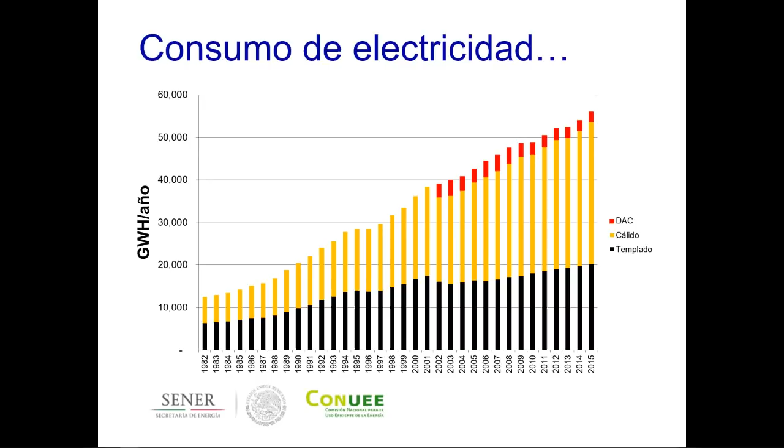One important reason for this is increased use of air conditioning. Y una razón principal para que esto sea así es el aumento en el uso del aire acondicionado.

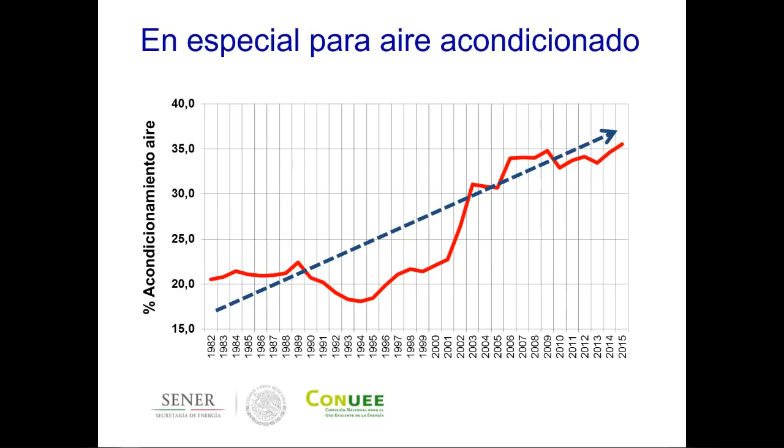The thing about electricity consumption for air conditioning is that it is peak demand. When you want air conditioning in your house or your office, that's when everybody else wants air conditioning too, the same months, the same hour.

So every extra demand for air conditioning is an extra strain on the whole electricity system. De tal manera que este aumento en la demanda, especialmente en la demanda pico, genera una fuerza sobre el sistema de generación eléctrico.

And this has a cost. This is the most expensive kilowatt hours, the peak hour kilowatt hours. Y esto tiene un costo porque estos kilowatt hora son los más caros, los de la demanda pico.

That's not necessarily what you feel in your electricity bill, but that is what the electricity system feels. Esto tal vez no lo vean reflejado en su recibo de luz, sin embargo, el sistema de generación de energía sí lo está experimentando. So, if there's a means of reducing this demand, it's worthwhile.

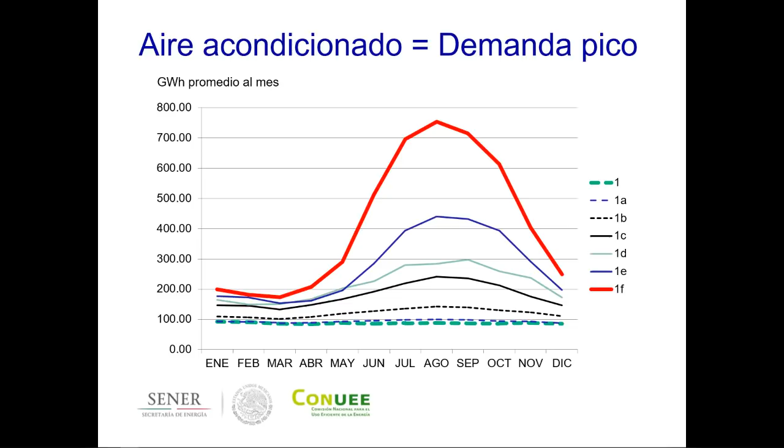De manera que si es posible reducir esta demanda, realmente vale la pena. So the question is, can you break this tendency, this trend?

Y si la respuesta fuera no, pues no tendría ningún sentido tener este webinar. So the answer is yes, but it's more than yes. It's yes, it's simple. Y la respuesta no solo es sí, sino es sí y además es sencillo.

If you think of your refrigerator, you also want to keep things cool inside there. Si ustedes piensan en su refrigerador, pues también quieren conservar dentro de él las cosas frescas. And there's a reason why the walls of the refrigerator and the door are thicker than the walls and door of an ordinary cupboard.

They are thicker because there's insulation inside. Y claro, están más gruesas porque hay aislamiento dentro de ellas.

And there's also a reason why you rarely see refrigerators made out of glass. I don't think you know of many people who put food in a glass container under the hot sun. We could say nobody does that. Creo que nadie haría eso.

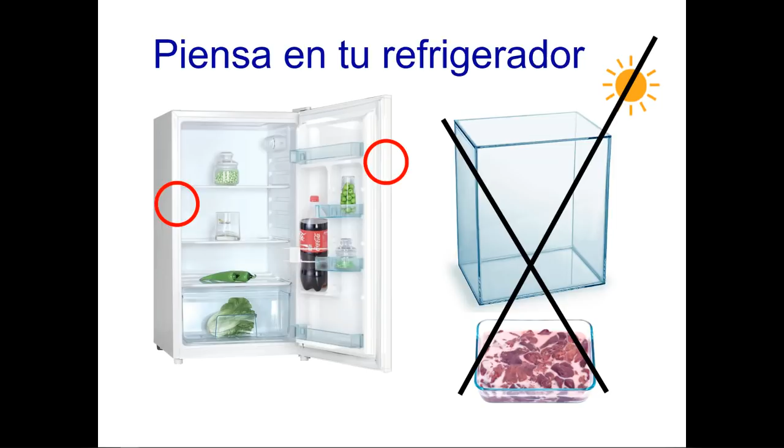That is what architects do to people.

So, what can you do to avoid this overheating of buildings? As I said, it really is very simple. Here's the first example.

That's the orientation of windows. If you put them to the east and west, they will see the sun, which is relatively low in the sky, and then the direct sunshine can get into the building.

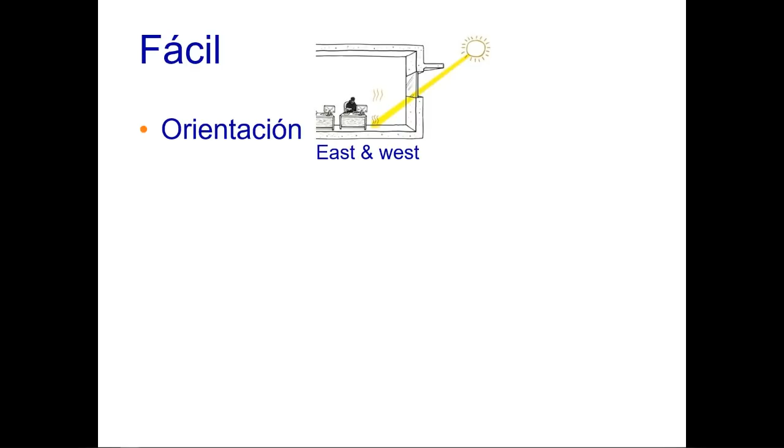But if the windows are to the south or north, then you will see the sun, which in these directions is almost at zenith, and it doesn't get into the building if there's a minimum of shading over the window.

And this is a no-cost measure. It doesn't cost more to put the windows south and north than to put them east and west.

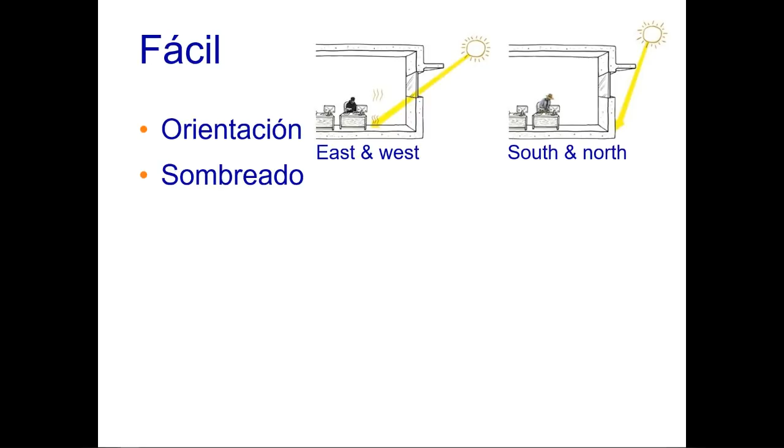Another example is that in general, of course, it's a good idea to shade windows so as to avoid direct sunlight getting into the building.

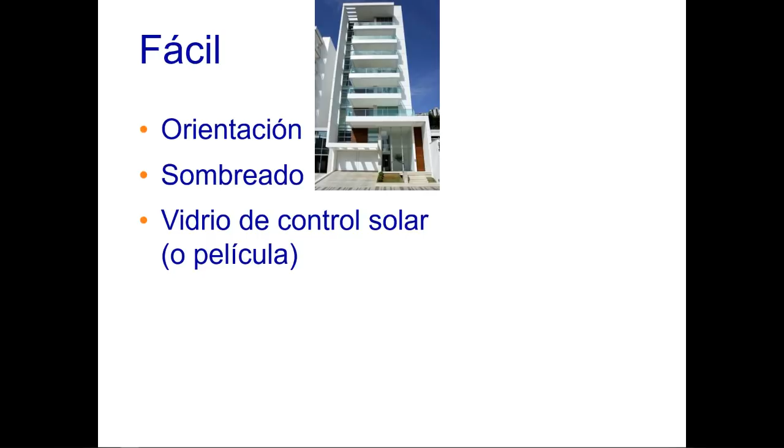A third example is solar controlled glass or film. This is already available in Mexico, and this kind of glass or film makes it possible to have daylight in the building, but to avoid the heat getting in.

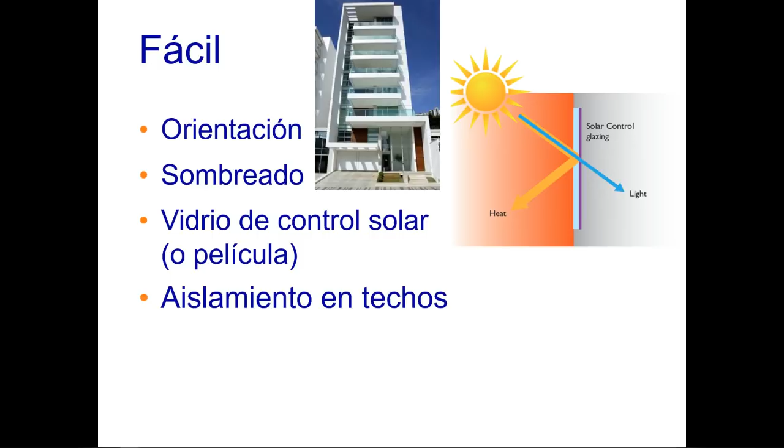And then, as we talked about with the refrigerator, there's insulation, most importantly in the roof. The picture there is the Vigueta y Bovedilla system, which is widely known and used in Mexico.

It's cheap. It's actually cheaper than an ordinary concrete slab. So why not use it all the time?

And then the last thing I'll mention is insulation in walls. All simple measures, simple technology, already available in Mexico.

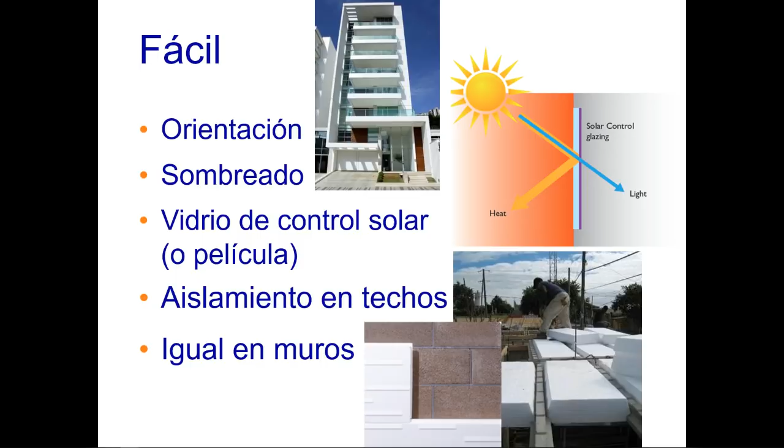Of course, you could ask, does this make sense economically? And again, we wouldn't have this webinar if the answer was no.

What you see here, the blue bars, is the extra cost of using this technology. The extra cost is on the negative side for most of the technologies.

And then the green bars, that's what you will save in your electricity bill over 15 years if you use this technology.

This example is from Villahermosa, Tabasco, but something similar applies to other hot places in Mexico, and we'd get similar results.

What you can see here is that the measures with the best payback are those applied to windows. Then comes the one for roofs.

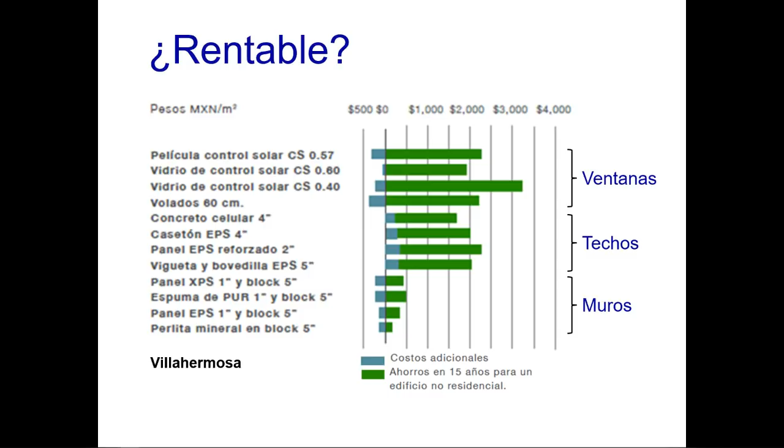So it is profitable, but there's still the question of the upfront cost. If that is very high, it might be an obstacle.

But actually, there is an upfront cost, though it's not very high compared to total construction cost. This example from Villahermosa shows the extra upfront cost, seen in the red bar, is only about 1.17% of total construction costs.

As we saw in an earlier slide, this extra cost is paid back by the savings in the electricity bill over 15 years of building use.

In this case, you get your money back 31 times over 15 years. That's better than putting the money in the bank.

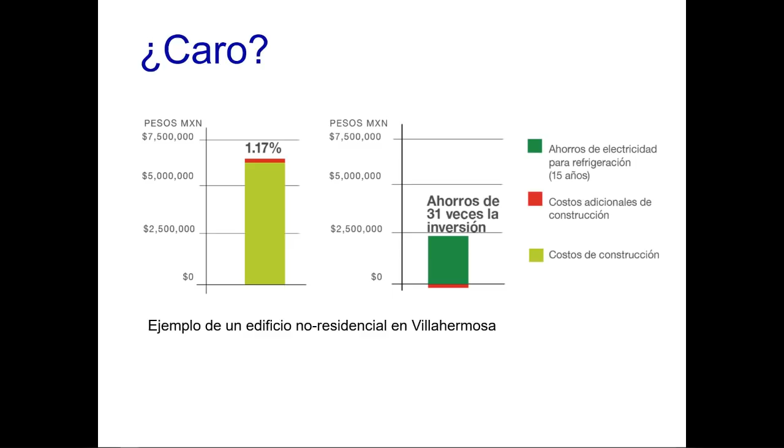As you know, stock prices go up and down and you never know, so it's a very unsteady income. But the payback from an investment in energy efficiency is a steady saving every single year, so you could say it's a banker's dream.

The cost savings we were just talking about are just what the consumer sees in the electricity bill. There are other costs from electricity consumption that will also be reduced. The most important is the subsidies.

The electricity bill is very often subsidized, and this is a huge cost to the government, as the Mexican government subsidizes electricity rates.

So if we can reduce the consumption of electricity, we can reduce these subsidies and the government will have this money to use for other, perhaps more sensible things like hospitals or schools.

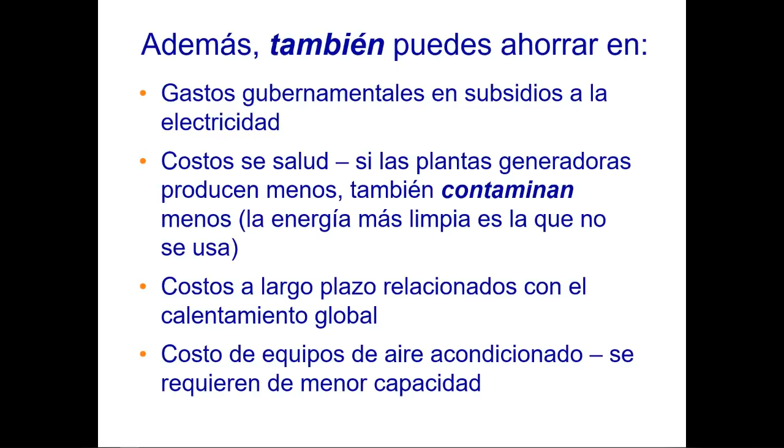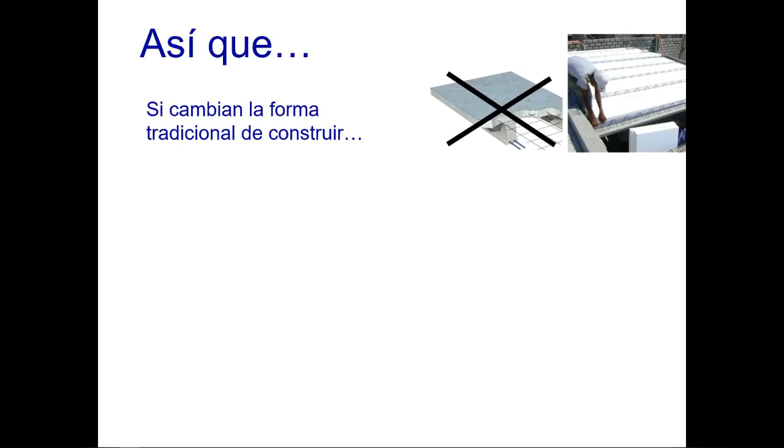So, to sum up, if you can change traditional forms of construction like an ordinary concrete slab and replace it with an insulated slab.

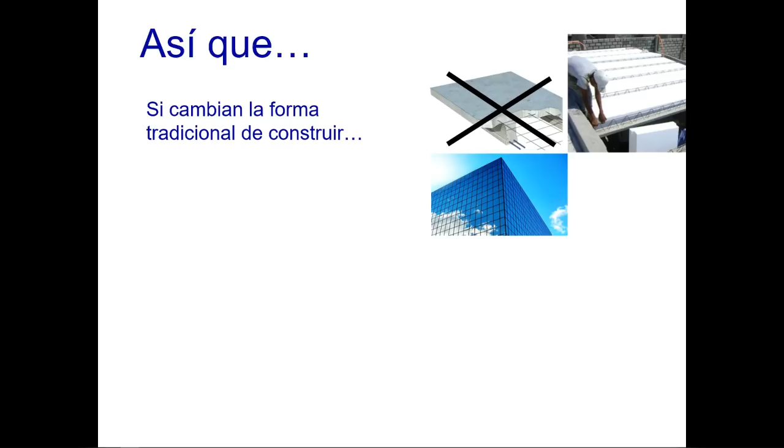If instead of glass boxes you can have windows which are oriented in a way so that the sun doesn't get in and which are shaded.

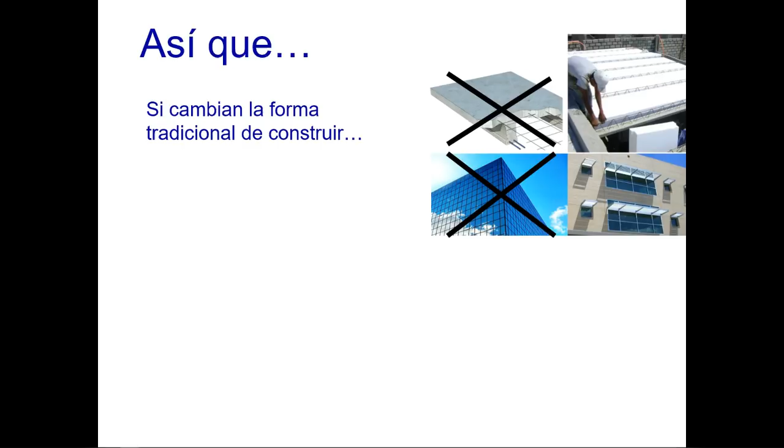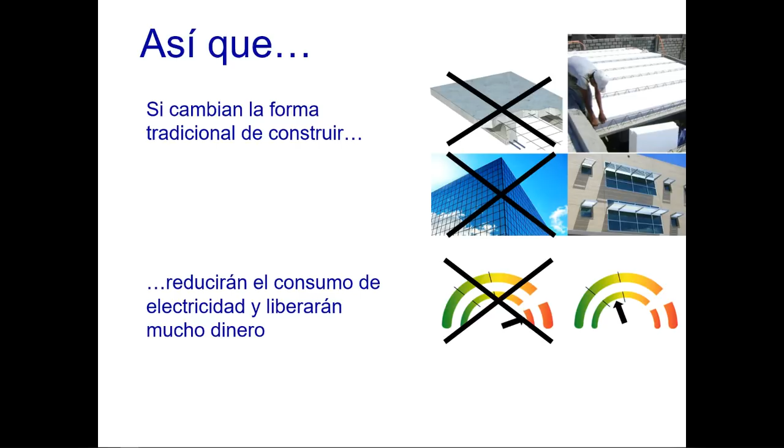Then you can reduce the electricity bill like this. And you can stop sending a lot of money to the CFE.

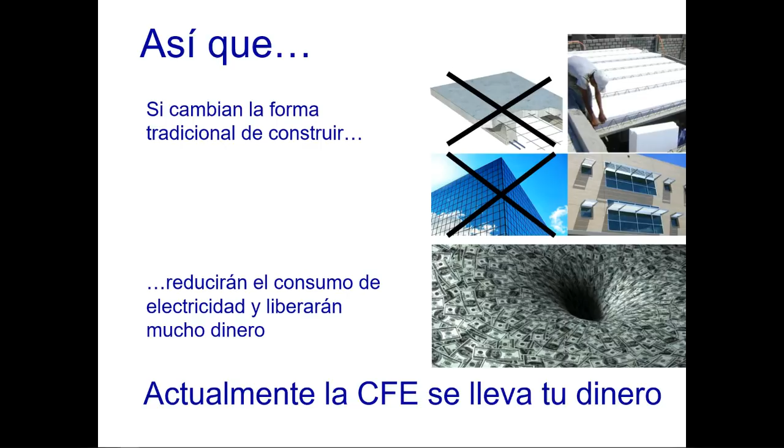And this money can be used for something better.

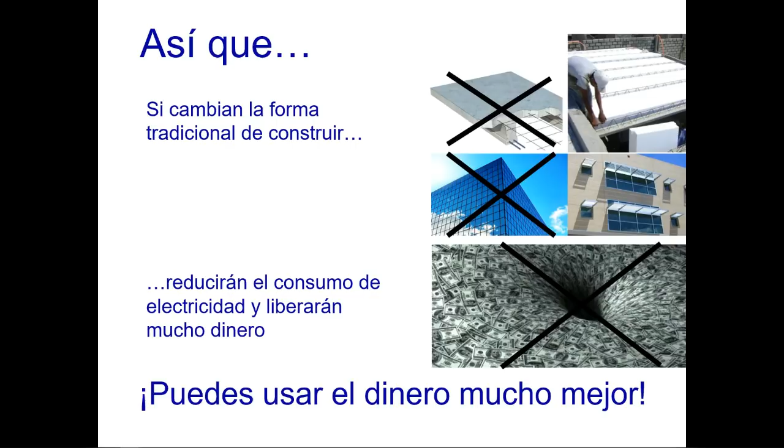The thing is, this is very much possible. You as a municipality can make this happen.

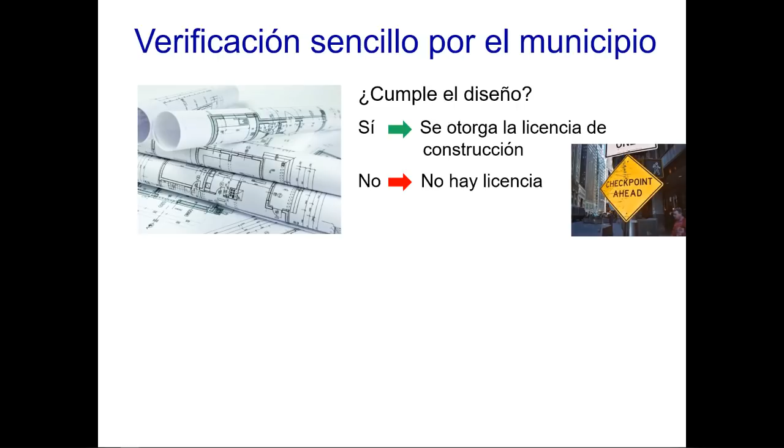If the unidad de verificación says yes, then you can say yes. And of course, if they say no, you say no.

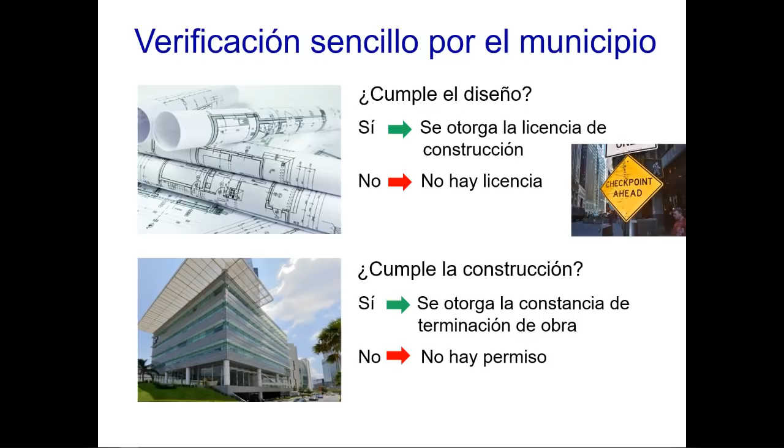And then the same thing when the building is finished. If the unidad de verificación says yes, the building complies with the standards, then you can give them the occupancy permit. So, again, really very, very simple.

We have made with CONUEE some background material, a practical guide on the implementation of the two standards, NOM 008 and 020. And a guide on how to make the calculation to see if the building complies. And a software to make this calculation very, very simple.

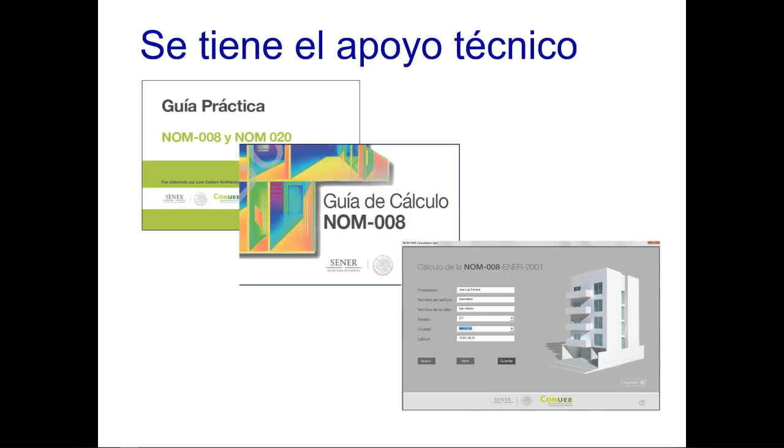A software to make this calculation very simple. And then a catalog of technologies where you can see different technologies which can be used for this, listing energy-efficient technologies that can be used for compliance with the standards. In the catalog you can see the cost of the technologies, how they work, how they are applied, and things like that.

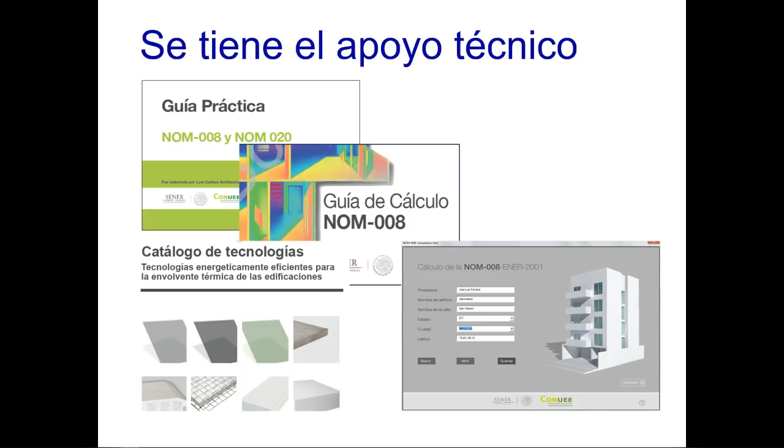Further, for those who really decide this and have it approved by the Cabildo, who want to go further and are willing to renew their regulations with Cabildo approval, there could be other forms of support like awareness workshops where we can invite all relevant stakeholders to inform them about this and convince them that this is a good idea.

If necessary, there can be legal support for integrating these standards into the building code.

And as I mentioned before, assistance for having support for local verification units (unidades de verificación).

And then, of course, training for your local construction sector so that they know how to design and build this way.

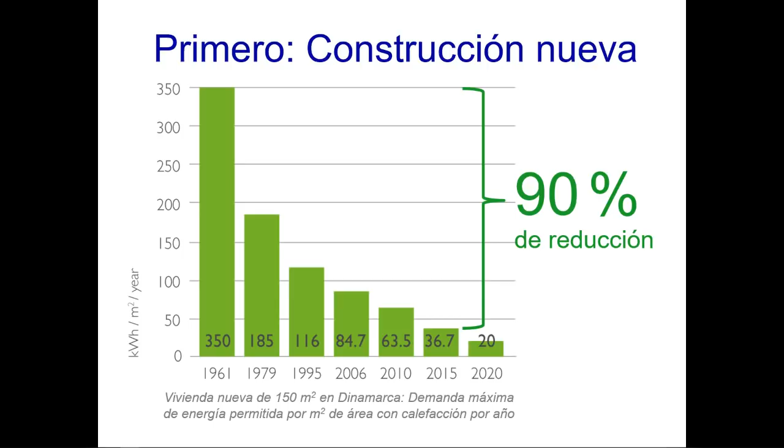But as I said, we cannot do the same thing for existing buildings. So we have tried a lot of other policies.

I will not go into the details. I'll just ask you to think, do you think this works? And, well, not really.

We have seen savings. In 40 years, we have saved approximately 22% of the consumption in the total building stock.

That's much less, of course, than the 90% you saw for new buildings.

And a part of the 22% can be explained by the fact that new, more efficient buildings have come up and older, inefficient buildings have disappeared. So a part of this result is actually also the result of the requirements for new buildings.

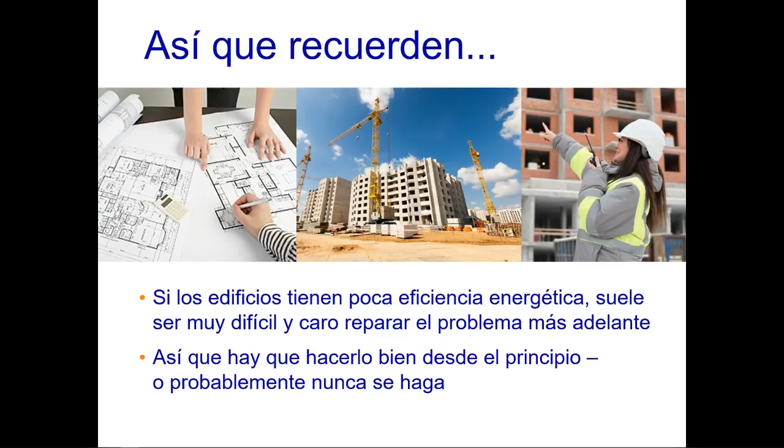Get it right from the beginning. Get it right in your new buildings, or you never will. So, good experience with new buildings, bad experience with existing buildings.

Then, here is another good experience.

This is about regulation specifically for windows.

In 2009, we negotiated with the Danish window industry about this new regulation.

And since Denmark is a cold country, the thing we wanted was to reduce the heat loss from windows so that the heat stays inside the building.

So what we agreed with the industry after much discussion was that by 2010 the maximum heat loss per year and per square meter of window would be 33 kilowatt hours.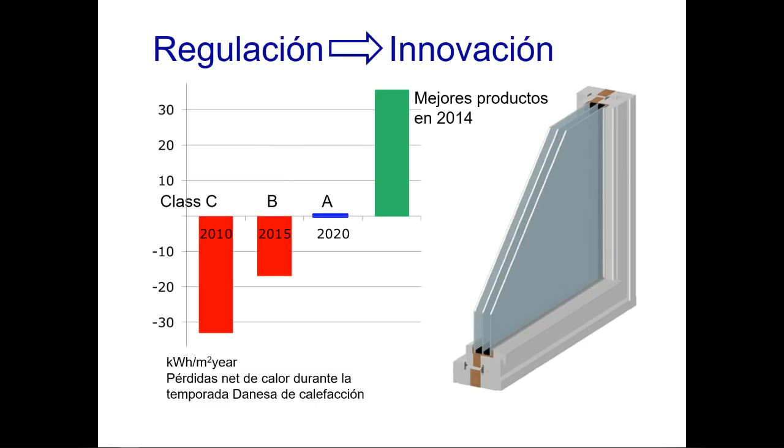And this small extra cost is, of course, easily paid for by the energy savings that these windows provide. So again, the lesson from this is that never underestimate how much competition and innovation and economies

of scale can do to reduce the cost of any new technology.

You know this already from computers and smartphones and things like that, but this general phenomenon also applies to energy efficiency technology.

So, the thing is that for this to start in the area of energy efficiency, you need to have the standards. That's really the thing that will start this.

So if you don't have the standards, you'll never see the big savings you can have.

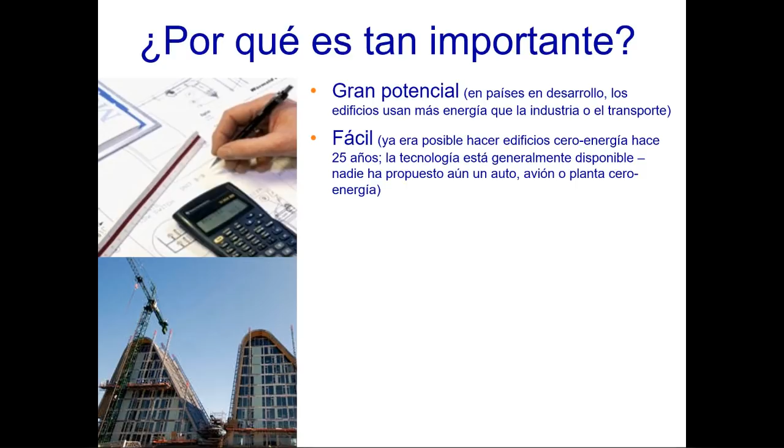The next thing is that it's so easy. As you've already seen, it's very simple measures. Already 25 years ago, it was possible, technically possible, to make a zero energy building. Well insulated, good windows, some photovoltaics on the roof, and you would have a building that would need no extra energy from outside.

That was 25 years ago. Compare that with the situation in other sectors. Even today, there is no such thing as a zero energy cement plant. There's no such thing as a zero energy commercial airliner. Or even a zero energy car. Not even in the laboratory somewhere. Doesn't exist.

The next thing, of course, it's very profitable, as you've already seen. And then it's local business.

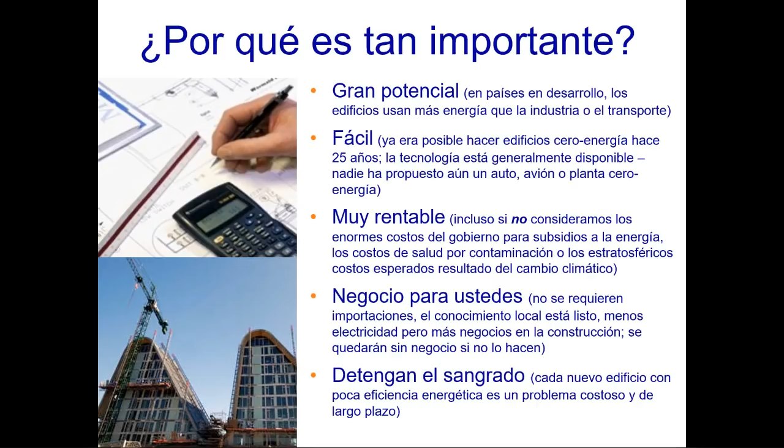What is the cost of implementing these solutions in homes that have already been built, or does it have to be done from the planning stage of construction? Yes, that's why we say you have to do something about new construction, because it's much cheaper to do it from the design stage. It is much more expensive if you wait until the building has already been built.

Do you consider it important to put an intermediate air layer in walls, such as in the case of drywall? If you think it's an important idea to put air between two sheets of wall as insulation—air is insulation, and air is of course a better insulator than concrete or brick. So yes, this could be a good idea, but again, the most important thing is to do something about the windows and the roof.